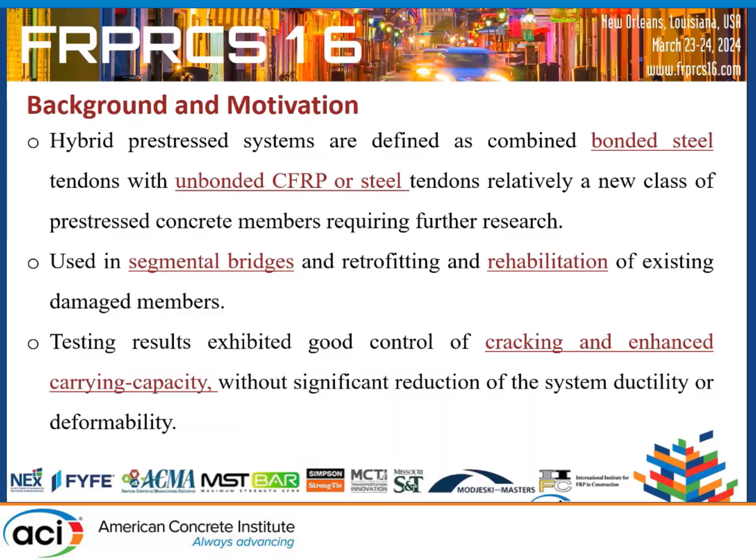And from our initial results we found out that the new hybrid system is really comparable to steel, and we should really push that, and that's what we're trying to do.

So the background about the corrosion - there has been a recent paper which has really covered exactly what happens. I'm also part of the team doing NCHRP 12-123, the load rating of segmental bridges. We collected data - there's about 400 segmental bridges in the United States - on their performance, and to our surprise they were doing very well.

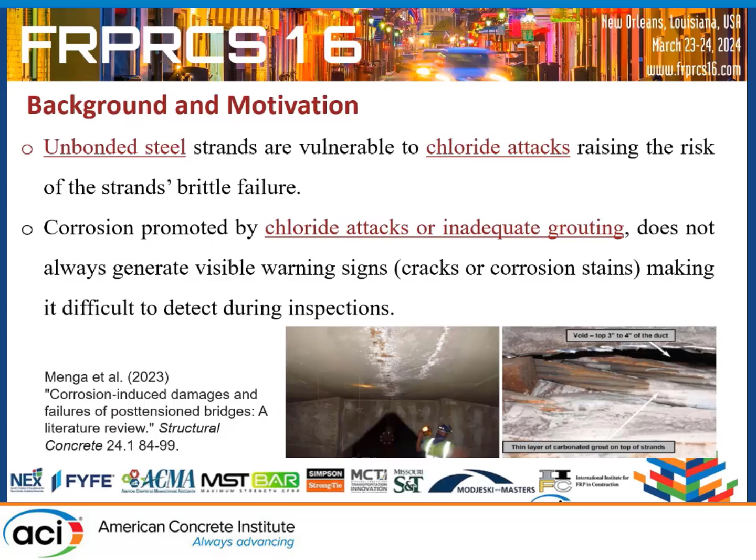However, some of them, as you'll see in the next slide, are only 9 years old and starting to corrode on the unbonded side. So there's a mechanism there, and unfortunately if you don't do a visual inspection it doesn't really pick it up. You have to do a very detailed inspection, perhaps some probes, removing some concrete to look at the tendon.

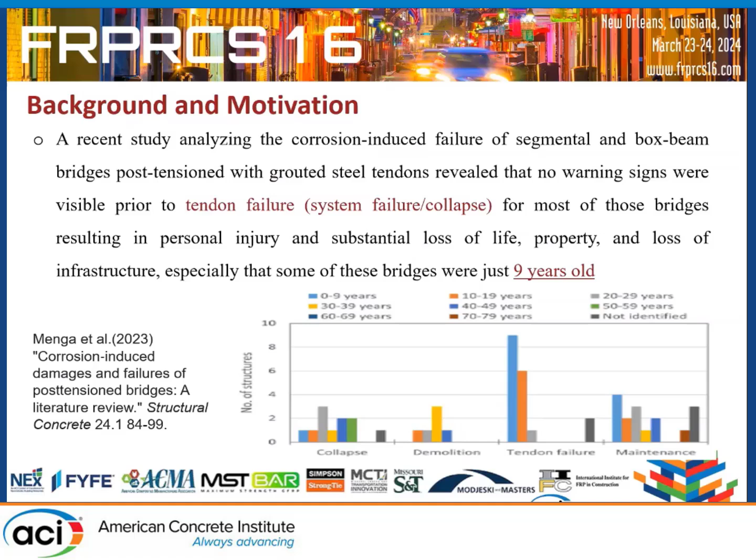So that's really very detailed, and the idea is, why don't we replace steel and put FRP in conditions where durability is of concern? That seems to fit very well. So the concern was, if I do that combination, what would happen to the overall performance?

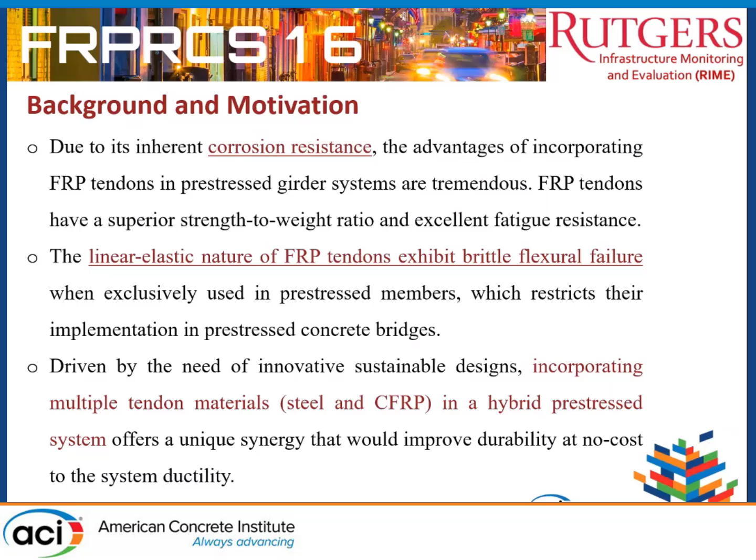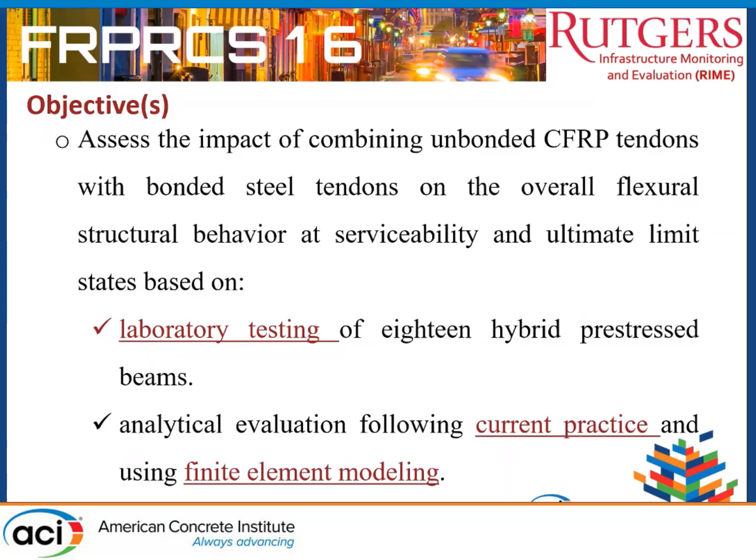So the objective was to look at the testing in the lab. We ended up testing 18 beams at the time, and we also performed some analytical study based on modeling in Abaqus. We also derived the equations analytically to have a closed form solution.

This is just to give you an idea about the testing setup. We had a simply supported beam, about 3 meters clear span, with 2-point loading for flexural testing. We tried to measure deflection at different points, and also to get the curvature over the length.

The notation is a little bit complex, so I need to spend some time explaining this. H means it's a hybrid, so it's bonded, unbonded. The X, if it's F, it means it's fiber, CFRP, and if it's S, it means it's steel. So if I say HF, it would be a hybrid beam with the tendon in the unbonded being FRP. Also the prestressing, if it's U, stands for unbonded, or B stands for bonded.

The last one here would be the different diameters. We were constrained by the different diameters of tendons we could use for this small scale testing. Sometimes we use 3/8 inch steel, but the equivalent in CFRP is not exactly 3/8. So we try to either base it on the area, or base it on the moment capacity, or even base it on the effective prestressing, so the force would be approximately the same.

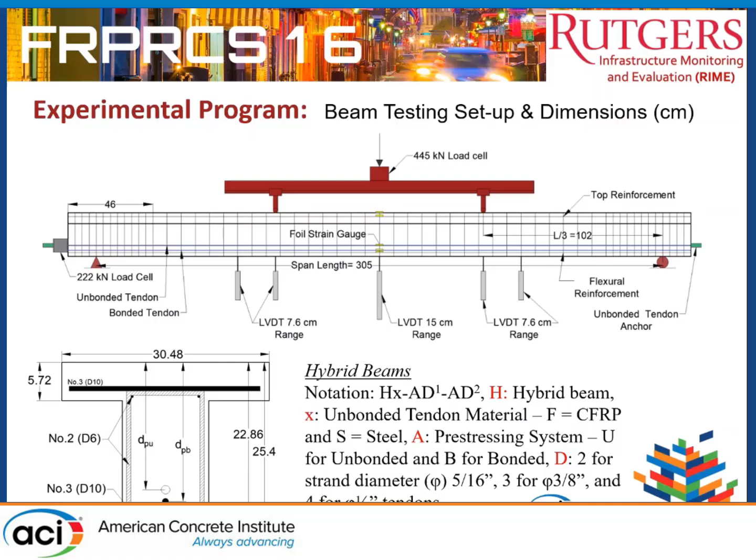This is the table of all 18 beams. This is too much to cover in detail, but I want to show you the notation. So we have 2 types of beams, bonded steel, same dimensions, and this is the effective prestressing. If it has unbonded tendon, if it has bonded here, if it's HS, it's steel. Sometimes we place the unbonded on the bottom and the bonded on the top, though we usually like to have the bonded on the bottom because that's what gives more capacity, but the difference is slightly small.

With this combination, when you have bonded and unbonded, we try to figure out what the reinforcing index is. If you look at the code, it's usually for fully prestressed or partially prestressed with non-prestressed reinforcement, so there's not much guidance. We ended up using what Naaman has done, the effective reinforcing index, looking at the total tension force divided by the compression force. That's an indication we added so we're consistent, and we know if that's a factor affecting how things change between the beams.

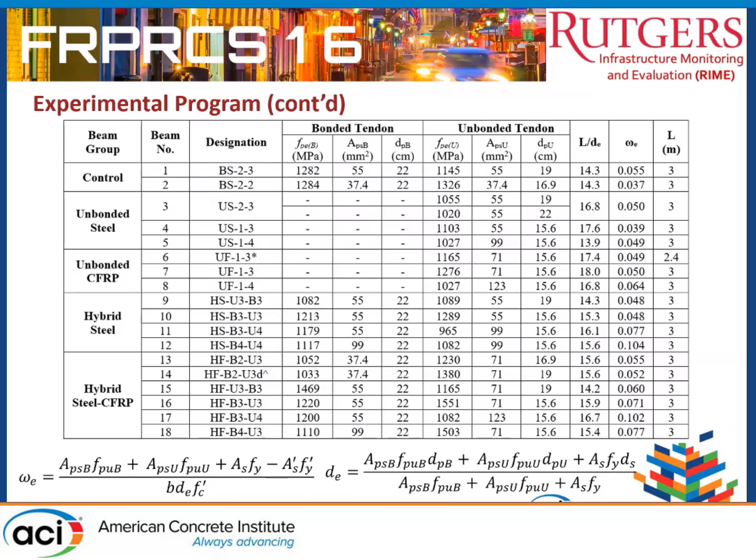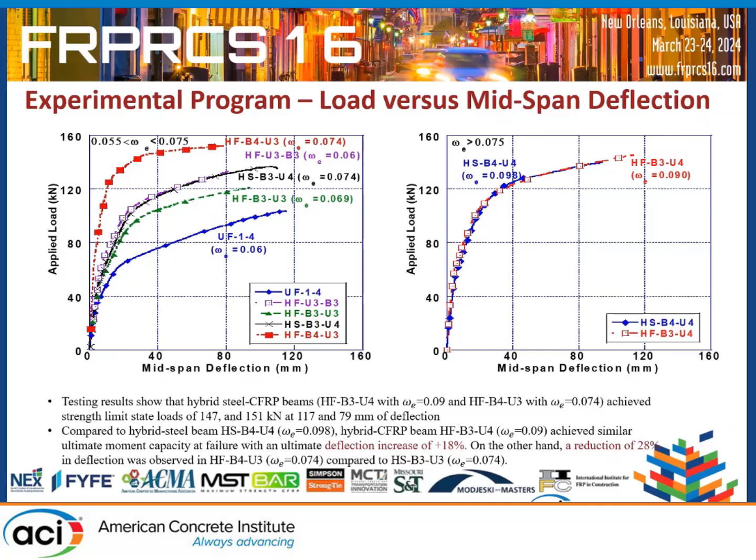So the system, when you combine the two, it starts giving you a little bit more ductility. These are some of the results. I know there's a lot of information here, I apologize, this is too crowded. I didn't have a chance to fix it, he did this work and kept it till the last minute.

We tried to look at, okay, so now the concern was ductility. We like to look at the traditional definitions of ductility. You have to get the deflection at ultimate divided by the deflection at yielding. The thing is that when you do FRP bonded, there's no distinct yield, so it's very difficult to get this value.

And this is another definition by Zou here, where there are many definitions in the literature on ductility. Sometimes people, instead of using deflection, use curvature at ultimate and curvature at yielding. But as a designer, you don't have this number a priori, so you can't get the load deflection ahead of time to know if this is ductile or not.

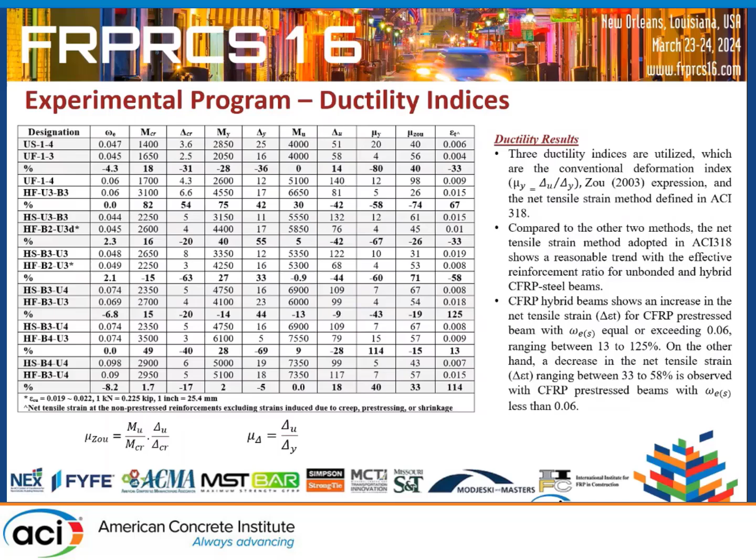Then we tried to look at what ACI 440 says about that. It's not clear - the 440R was a great document for its time, and in my opinion has good stuff in there, but it needs to be updated as far as bonded, unbonded. That was not being considered.

One of the things, I think it was mainly focusing on bonded FRP. If you read that carefully, what they're saying is that they use balanced condition - that means when the concrete is crushing, the FRP is going to rupture. In unbonded tendon, that's a no-no, we don't want to do that. Maybe limited to 0.9 FPU, but this is not a very good approach for unbonded. You might utilize the FRP capacity, but not to that point.

So that approach, I don't think we can apply it the way it is right now in 440. It needs to be changed. It cannot be applied to this situation.

If you look at comparison with 318, what do they do? Well, 318 changed - when Mast did his paper in 1992, they shifted, instead of going to rho balanced and all of that, he said why don't I look at the strain in the tension reinforcement. If I have non-prestress reinforcement, the strain has to stay about 0.003 plus the yield, where the yield is about 0.002.

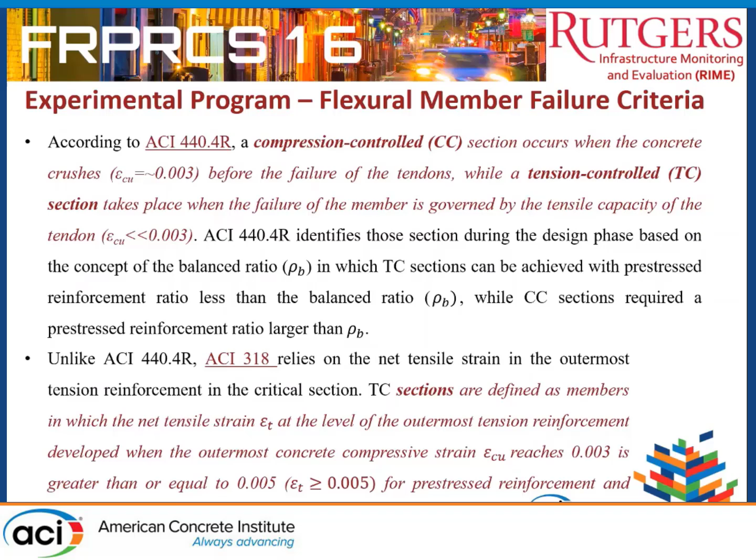So this is some of the results. We looked at the beams that we designed and what type of failure we had. So some of them were tension controlled, but the majority were compression controlled - the concrete failed before that.

We also looked at how 318 handles the failure - there's a slight difference in interpretation between 440 and 318. The inconsistency in the type of prediction really needs to be zoomed in on and worked on.

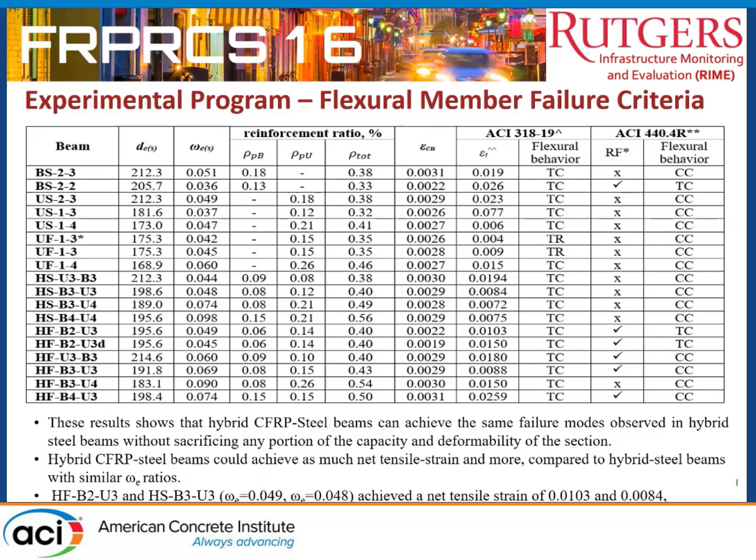I'm hoping the 440i will address something like that. You're leading that chapter, so... We'll see, I can't do it alone.

Okay, so we looked at what 440's basic approach is there. So 440 looks at, okay, fully cracked section - we use IE with the modification that Wasim just talked about a little bit, but it's still using the older beta D, which is still applicable. I think it gave reasonable results, right Wasim? And the i-crack is fully cracked section, so you need to have the neutral axis for a fully cracked section.

The problem is when you have bonded and unbonded, how do you find the neutral axis?

Either you have to do the strain compatibility approach, meaning you solve it incrementally, and you find the strain in the bonded tendon using strain compatibility. If you have non-prestressed reinforcement, you would have to do the same. So it's a very lengthy approach, but nonetheless, this is what's in 440 right now.

And for the unbonded case, this is the equation for bonded, from compatibility, you can see it. But this equation here uses the equation developed by Al-Khairi and Naaman in 1991. It has the gamma factor, and this omega factor, which for this case is considered constant.

What is this omega factor? They propose that an unbonded beam can be converted into a bonded beam by assuming the strain of bonded over unbonded is this omega factor. However, the strain once it cracks in the elastic range, that's beautiful, right? You could do that. This is based on what Baker did in the 50s in England.

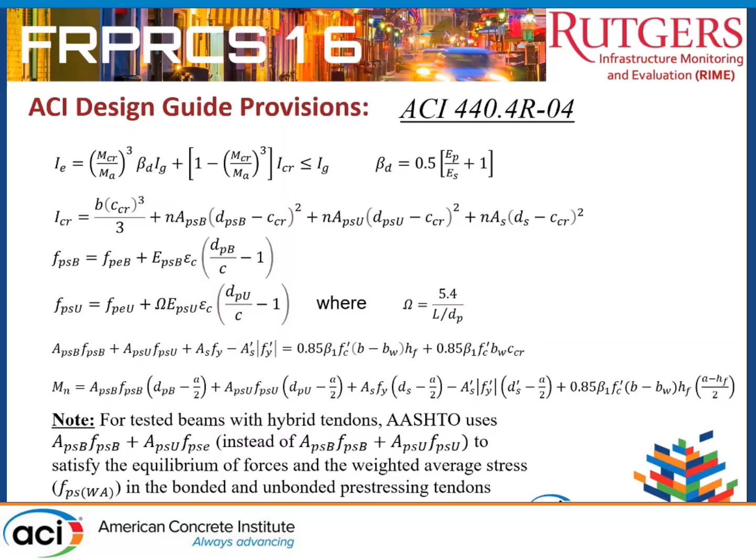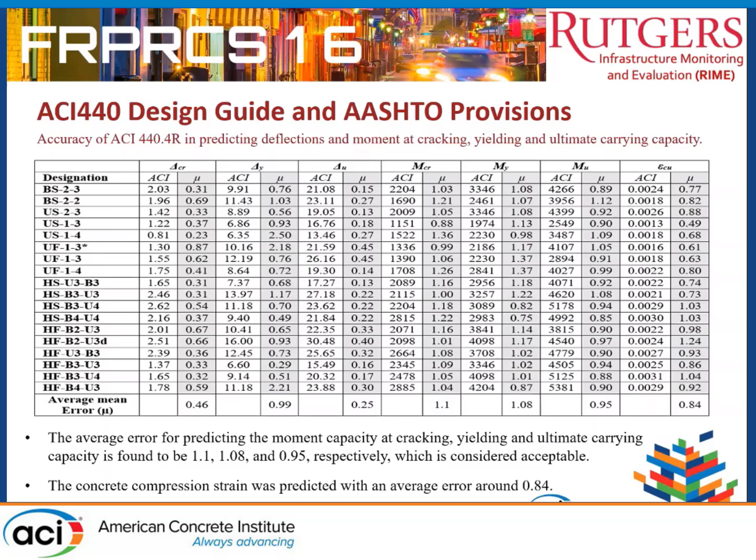So if you look at it, we calculated the accuracy. This equation in 440 does a great job predicting the moment, the curvature, the moment and the deflection. You could see that, for example, at yielding, the average prediction was very good, and the moment was very good. However, for the ductility, it wasn't very good.

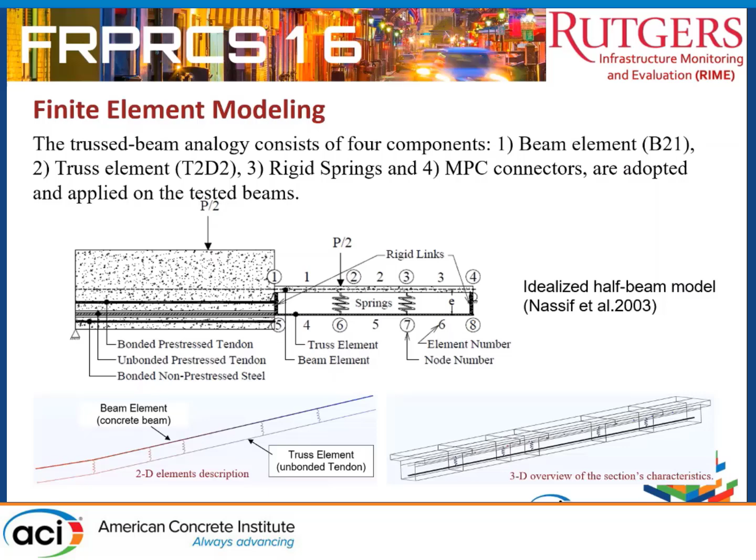We did the modeling, I'll go a bit quick here. We did finite element modeling based on this, trying to decouple the unbonded tendon from the bonded tendon so it becomes like a beam. This is the concrete element, it will have the bonded reinforcement and the bonded non-prestressed reinforcement, and the unbonded tendon is free to move since it's unbonded. We did the modeling on that basis, and it did really well compared to all the beams.

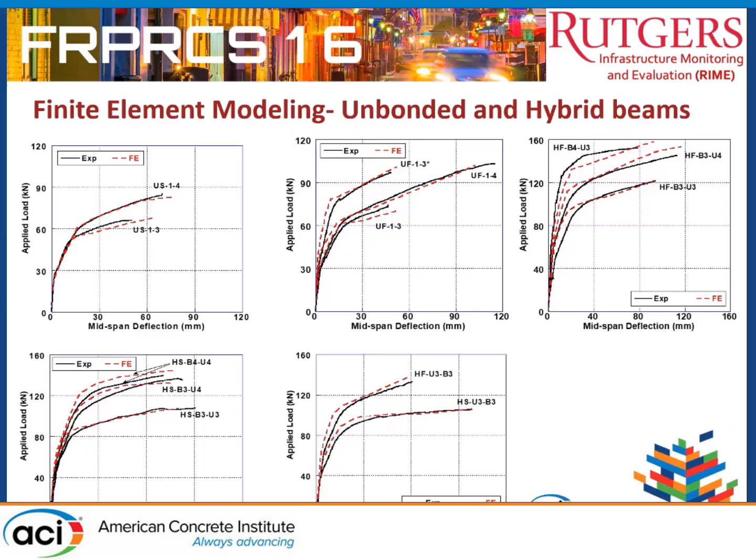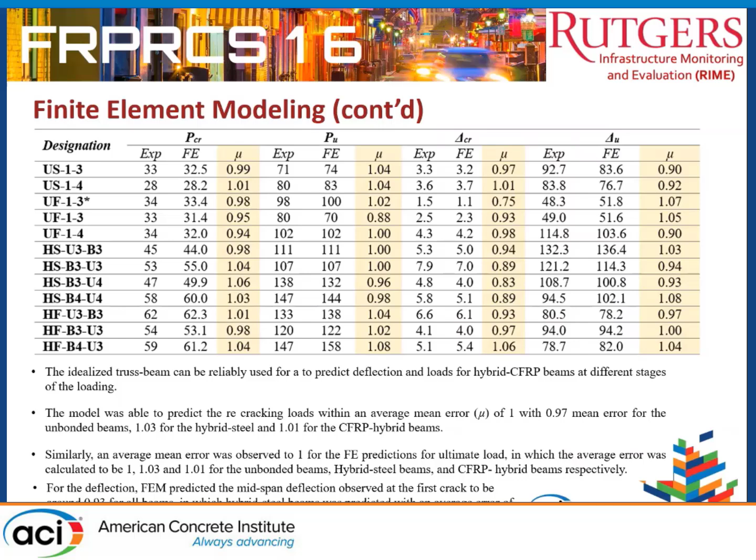So we were able to have a tool to basically go beyond what we did experimentally. And if we look at the predictions in terms of load, the model does a really great job getting the deflection, the moments, and the ultimate load.

But if you look at what happens with 440, again, as I said, the cracking moment is very good, the ultimate moment is very good, but look at when we're trying to predict the curvature ductility using both definitions, it's really not that good for ductility. That's probably one of the reasons 440 needs to address that.

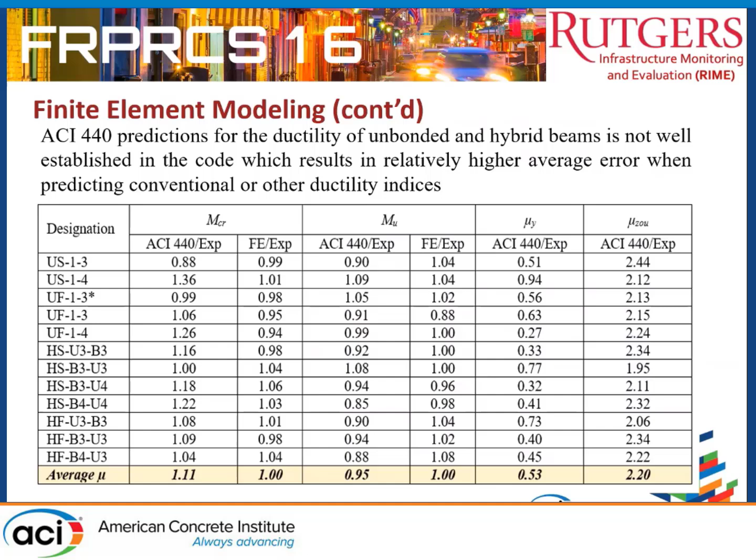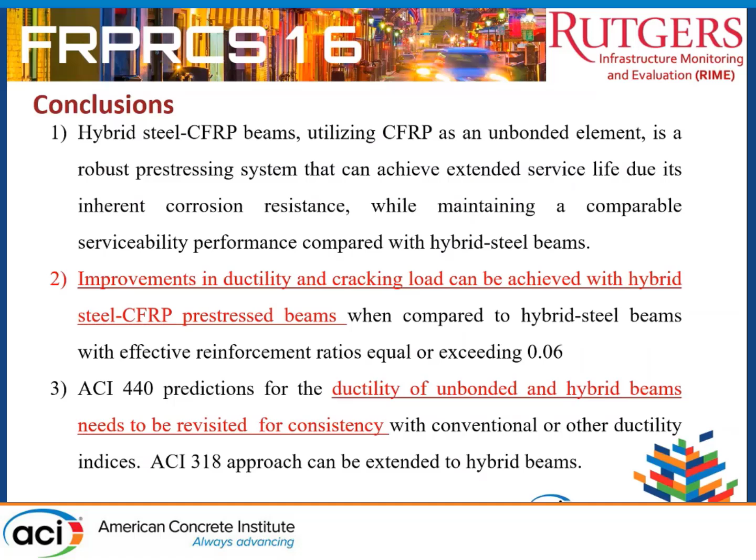So I think using FRP now as unbonded in this hybrid system can improve ductility, can give you the exact same cracking behavior, same crack spacing, crack width. It's even better that once the unbonded tendon does not fail, the cracks will close. Even when you unload it, the cracks will go back to being very small. So the ACI prediction for ductility needs to be revisited. That's the main conclusion, and we're hoping for 440i we will be able to do this work.